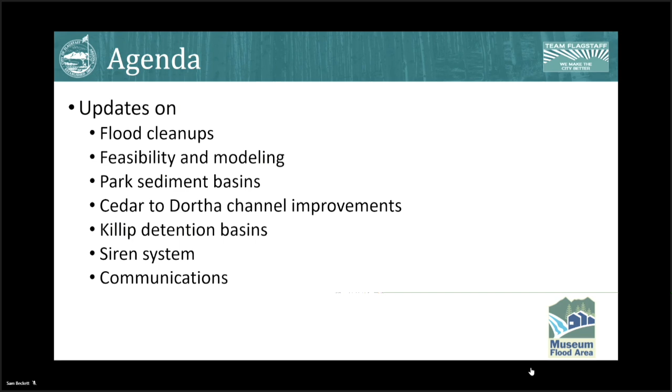Okay, Ed, I believe, are you going to discuss some of these? Yeah, I'll go through these flood cleanup slides. I believe we have two of them. Good afternoon, Ed Shanks, Stormwater Manager.

So since the beginning of 2022, so just last month, we have some new internal work orders with our two existing water service operators, our WSOs, for cleanup of last year's events. This includes the Rio de Flag downstream of Spruce Wash, so downstream of the confluence in the Foxglenn Park area. The Rio de Flag up in Cheshire, so a different flooding event, but the flood event that happened up in the Fort Valley trail system area, cleaning up that Cheshire Park area.

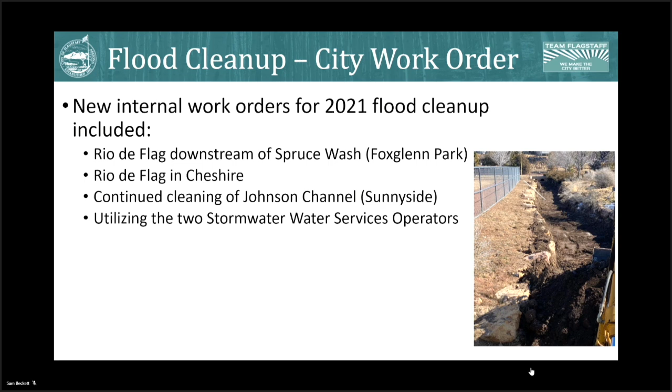Continued cleaning of Johnson Channel. This is a small, very small tributary to Spruce Wash in the south side of Sunnyside. That's actually just finished up. And as I mentioned, this is utilizing our two existing stormwater operators. In addition to that, we have contract work ongoing in the last month and a half or since the last flood update. That includes a new award for work in Fanning Wash at Bushmaster.

This is to repair the fence that was just completed and then was wiped out a week later in the flooding. As well as concrete channel repair. We have a few concrete panels that pulled up near Siler Homes that will need to be replaced. And replacement of two trash racks over an inlet and an outlet. We also have work, Spruce Wash at Route 66. So this is behind kind of Sportsman's area, the Blimpies.

We have a low water crossing repair, which is partially funded by a 2019 FEMA grant, and then sediment removal from this last year of flooding. And then we have at the moment 5 small spot improvements for flood repair that has also gone out. So these 3 different bullet points have been awarded to 2 of our JOCs, 2 of our job order contractors, Tiffany Construction, as well as Kinney Construction.

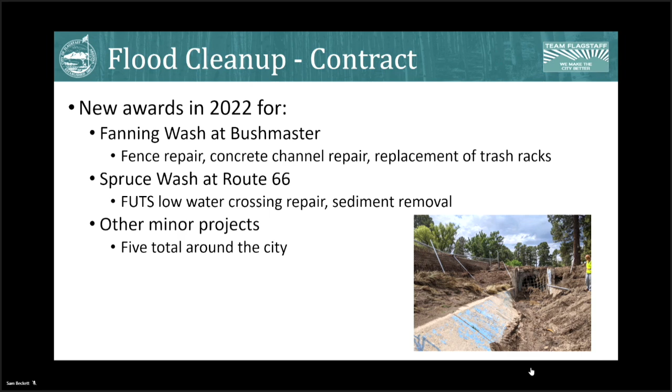Also, with flood cleanup, Parks has been working with facilities and stormwater and installing a new pump and aerator system at Frances Short Pond. As you might have remembered, we did have a fish kill this last year, partially due to the fact that our 2 existing pumps that run 6 aerators are old. They're also run on solar, and the solar is a little finicky, especially on cloudy days. So this will be a hardwired pump on the shoreline, so it will run 24/7.

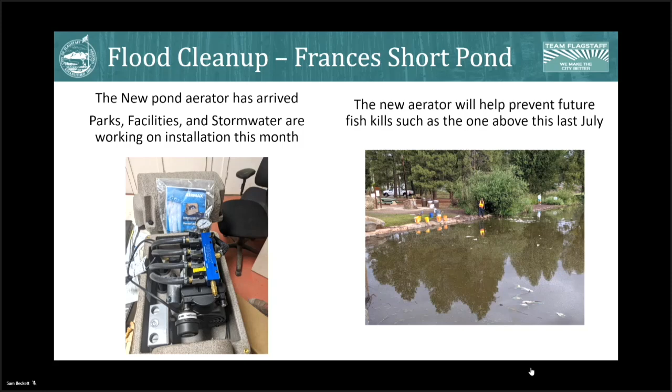Once we have this up and running, we will contact Arizona Game and Fish and have them get back to their regular schedule in terms of fish stocking. And with that, I think I will turn it over to Julie.

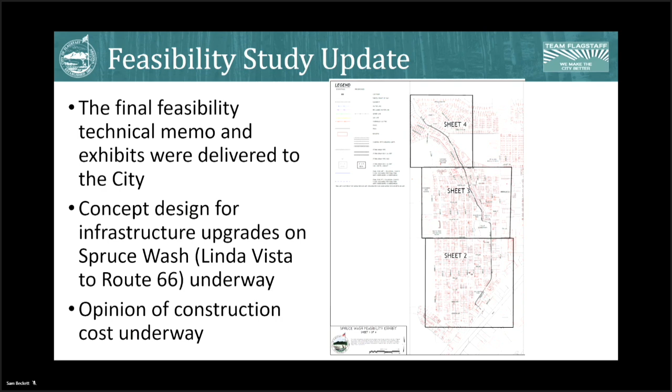Thank you, Mayor. So the update on the basins upstream of Linda Vista is that work continues with the Army Corps of Engineers, and we've really begun in earnest meeting with residents one-on-one. The unique part of this project this time is that there are potential jurisdictional waters of the U.S., and so that's a significant process, meeting with residents and working through that permitting process. There's also the work that Lucinda talked about last update related to SHPO, or the State Historic Preservation Office.

There's a public comment period that'll happen. There's been an announcement that's gone out that announces a public meeting, and it's all related to the Beale Wagon Road that goes through the area, or at least a portion of it. And so work continues with these permitting and regulatory parts of it.

The design continues to be refined and reviewed, and we're working with utility companies to look at utility conflicts, and also working with City of Flagstaff right-of-way and easement people to understand how we can move forward, converting parts of the easements that are currently held to appropriately reflect the type of easement that may be needed for these basins.

And so we're still working. It's quite a large effort here, and we are optimistic, but as Lucinda mentioned before, it's likely this project may push into the next construction season, but we're crossing our fingers, and we'll see where we get.

Thank you, Christopher. And I just might add, I appreciate the leadership on this one. This one's been a very technical project with a lot of intricacies, and the design consultants have been experts at the table, but the county efforts have not gone unnoticed, and we've appreciated the assistance trying to get this one delivered very close to our adjacent infrastructure, and it's been going fairly smooth considering the complexities.

Thank you again for joining us. Vice Mayor has a question here. Thank you, Mayor, and thank you, Christopher and Scott.

So first of all, forgive me if I'm asking a question that seems really elementary to you. Residents are held to a no adverse impact for anything they do on their property. Are city and county projects, when you do the modeling, that's one of the elements that you're looking for too, correct? That whatever we're doing has no adverse impacts downstream.

Exactly, and the way we go about this adverse impact analysis is we actually pull a third party in to conduct that analysis so that, in a sense, they didn't have any stake in the design and they didn't have any stake in the construction. And they're a third party that reviews the design. They run an analysis and they identify if there have been any increases in water surface elevation or increases in velocity as a result of the project.

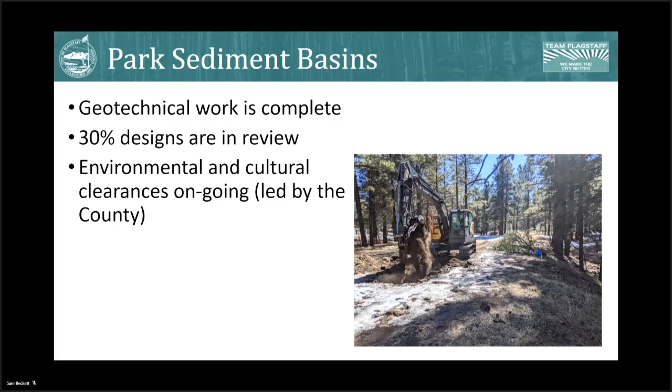So it is worth noting that no matter how much engineering we can do here, it won't be the end all for all residents throughout the wash. Thank you, Scott. I appreciate that. And I have heard you all say that several times, and I think it bears repeating every time we get a presentation that we're working under certain constraints. And so I just want to acknowledge that.

Thank you. No, thank you. I appreciate it. We've all trained each other well. We're all starting to speak the same language, so that's a good thing. Thank you, Christopher. Yes, thank you all. I think we are ready to proceed. I'm not seeing any further Cs and Qs from council.

Thank you. And next up will be Christine Cameron to give us an update on the Cedar to Dortha Channel Improvement Project. Great, thank you, Scott. Mayor, Vice Mayor, and Council, I'm Christine Cameron, Project Manager with Capital Improvements. So our project scope, the city is constructing channel improvements from Cedar Avenue down to Dortha in the Spruce Wash. This is the area between Main Street and Rose and Sunnyside. The channel is currently cutting into people's properties, undermining fences, and was scoured out last summer with the flooding.

We'll be regrading and lining the channel with shotcrete, which is a concrete material, and a grouted riprap, which are large cobbles. And this will provide stabilization to that channel area. The crossing at Dortha will also be reconstructed. The crossing, which is the inlet, is currently a 60-inch pipe, and this will be upsized, as Julie said, to a 12-by-8 concrete box. And this is about 120 feet in length, so it will pass a lot more water. We're looking at doubling the capacity from a current 600 CFS to 1,100 with this phase. And when the future improvements are made to the south of Dortha and the future phases of the Spruce Wash improvements, and that pipe is enlarged, we'll see closer to 1,400 CFS.

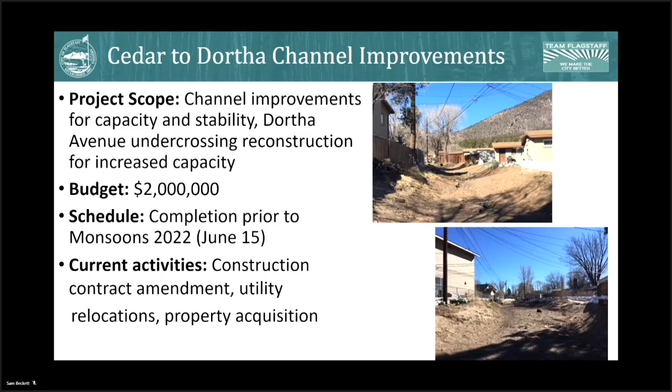Next, we have the Killip Detention Basin project. You saw me a lot during the IGA process. I believe Adam Yali's with us from Public Works, our engineering staff, this evening. And while I kind of failed to mention to him that there was a formal update this evening, I'm sure he'd be well versed and prepared to speak to construction activity as soon as he chimes in with us. But generally, the project is going well. If you've been by Killip School, you'll see that the large basins are being excavated at this time.

Oh, got a thumbs up from Mayor Deasy.

Adam, do you have anything to add or anything you would like to note of this project? Absolutely. Good afternoon, Mayor, Council. Scott, thank you for the pitch. I appreciate that.

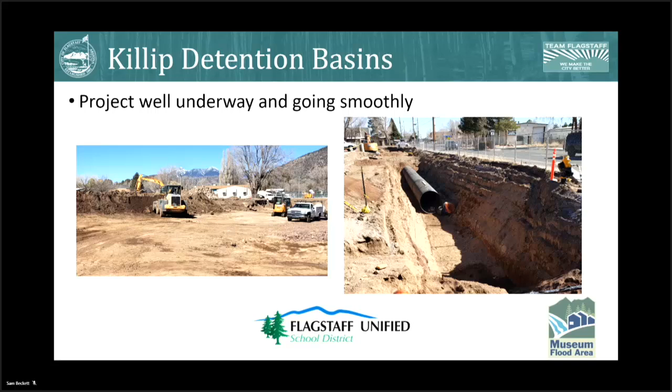Moving to the structure that is now being called the Killip Inlet at Ponderosa Park. This would be the structure that will be built adjacent to these facilities, just to the north in the actual Ponderosa Park that the city owns. If you recall, we built a slip or an exit lane for overflow waters to move where they were already headed. We just kind of helped them get there so they would not impact Arroyo Seco quite as badly. We've used Ponderosa Park for this conveyance exercise, and unfortunately it's done a number on our own city park.

Better than homes, but at the same time we knew we needed to probably think about what the design looks like to move the water from the top of Arroyo Seco into these detention basins. We have shifted some of our engineering efforts and some of our teams to start to solve this problem and to come up with mitigation efforts that make a lot of sense. We have been working with parks to start thinking about different integrated elements. We want to make sure that if we can build a Hagen half pipe, that's exactly what we do in a park that needs a lot of attention and a lot of improvement.

So we're hoping, if possible, we may be able to get some park amenity while building a conveyance amenity into the detention basins from top of Arroyo Seco. Remember, our primary conveyance will be the primary reason and rationale, but we really would like to continue that discussion with parks and the community about how we can improve that with some sort of amenity. So we'll be back to you with more information about this project. We think it's likely in the next couple months to be in more of its final design state. At this juncture, it's really preliminary, and we're just continuing to work these problems as we move through the wash.

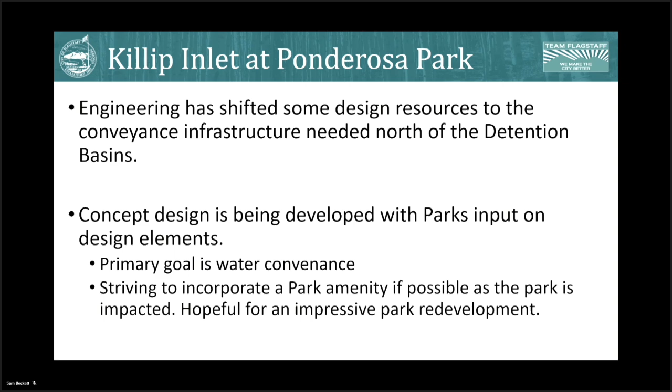Sam, I believe you are up with the next item to discuss our upcoming siren system.

Real quick, Scott. So you're saying that there's a potential we're going to be able to put in a half pipe of a skate park or something to that effect in that area? So I always say something like that, and then I get myself caught.

So we affectionately refer to this item as the Hagen half pipe in reference to Amy Hagen, our parks director. She has been very instrumental in working with us to try to come up with some different ways, and her team with Rebecca have been in discussions with us as how can we come up with a creative park amenity when it is not a flood conveyance.

So we've thrown out some ideas, and we're pushing these engineers to come up with some solutions and some ideas that might make sense. And the Hagen half pipe continues to come to the top of the list as a cool amenity. Not quite sure what it's going to look like, but we think we can get there.

That's awesome. That's a really great idea, and I just want to say that we'll need to continue to call it the Hagen half pipe if that's what we put in there. Right. I think that's awesome. So thank you. We made her clean up enough mud out of that park this summer that it's the least we can probably do. Yep.

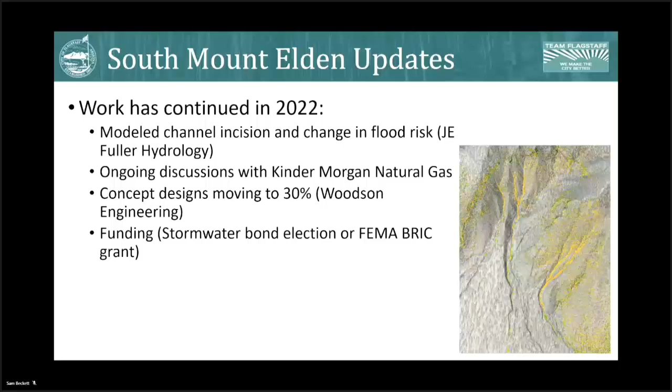Okay, so if there are no other questions, I can move on to Sarah. Yep, we are good to proceed. Thank you much.

All right, good afternoon, Mayor and Council. Sarah Langley, Public Affairs Director. I have the last slide of the evening for you tonight. Some notable communications outputs to report to you.

We have launched our project website, which is museumfloodprojects.com, on February 7th, so a few weeks ago now. The website has information on all of our different projects that were discussed tonight. It also features a page where everything is translated into Spanish. It has a page where you can view all of the past city council meetings that we've had, agenda items that we've had on museum flood updates all in one spot.

And it also has a page where you can kind of stay informed and sign up for our e-newsletters, sign up for emergency alerts, other things like that. As of Monday, so yesterday, we had about 750 page views on our website. So it looks like the community is getting to know the website and using that as a resource.

In addition to the website, we mailed out our first physical project flyer last Wednesday. That went out in both Spanish and English to all city residents in the impacted area. We followed that up with an e-newsletter, which is basically the same content as the flyer, but to everyone in our email distribution list, which is over 450 email addresses, just to make sure that everyone is receiving that information.